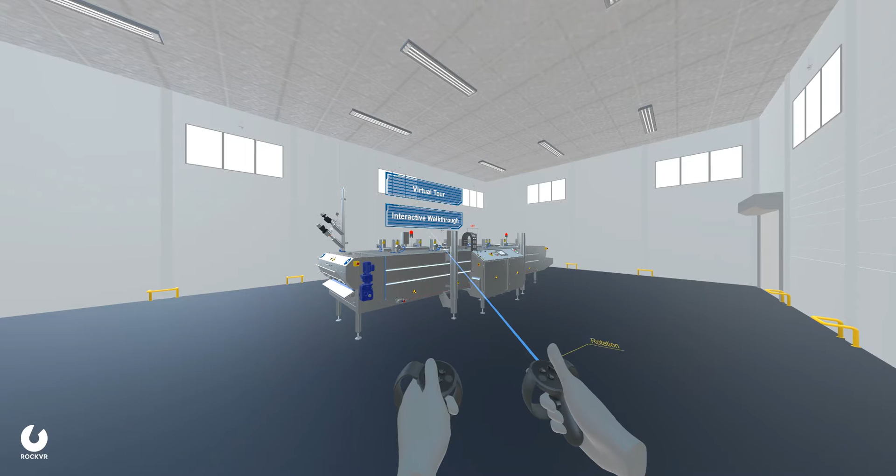This is a 2019 model.

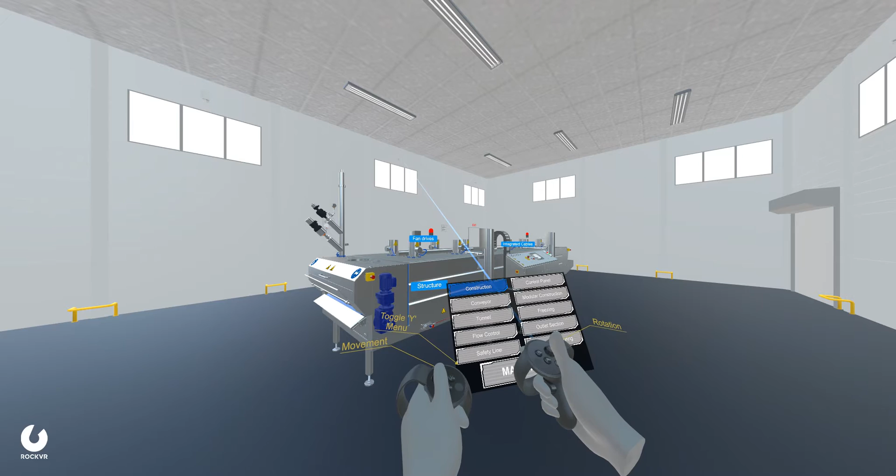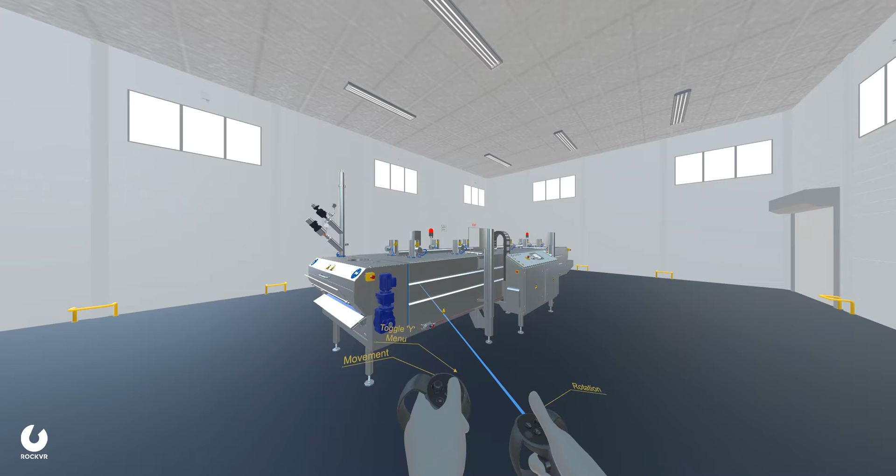Dohmeyer Tunnel Freezer is constructed according to USDA and FDA guidelines. The tunnel structure is made exclusively with stainless steel and blue, high-density polyethylene plastic.

No use of chrome, galvanized steel, or aluminum in any area. All the edges and curves are fully welded. The walls are made of stainless steel, both outside and inside, with high-pressure injected polyurethane foam insulation between the walls.

Unlike some competitors who may use wood insulation or mild steel on the inside walls, we use exclusively stainless steel and polyurethane foam.

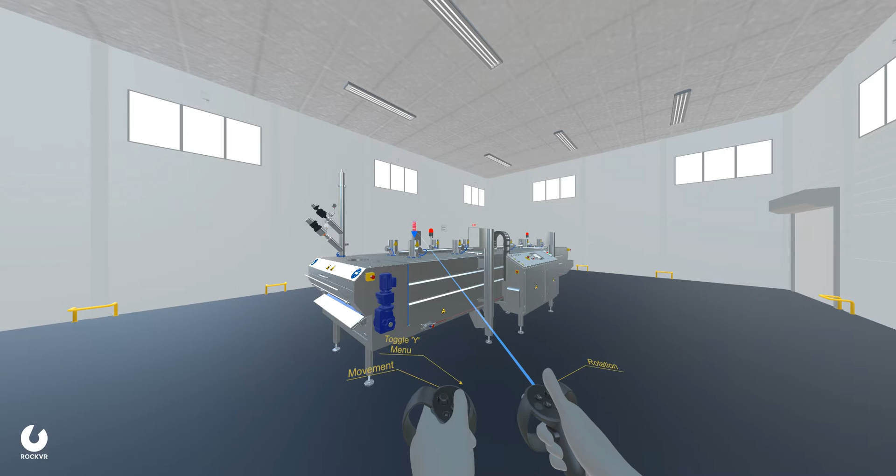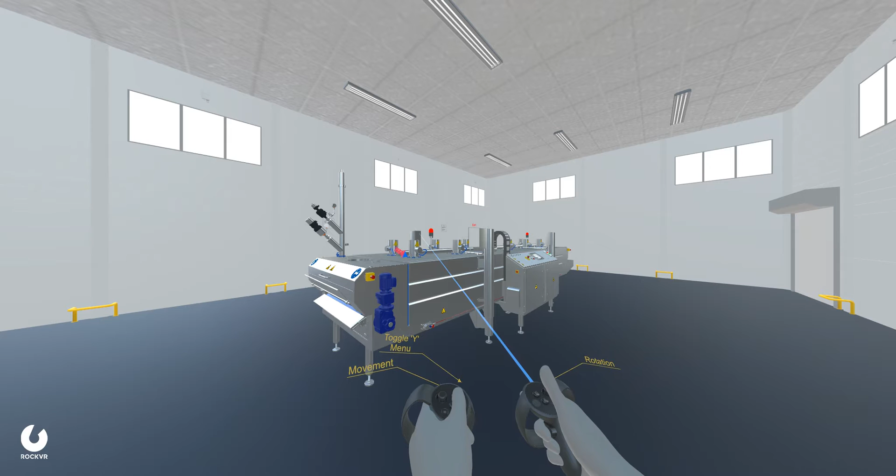The internal convection fans are driven by motors with stainless steel outer housing. They do not have any ventilation openings at the top, which makes it easy for a washdown. There are spacers at the mounting points for easy cleanability.

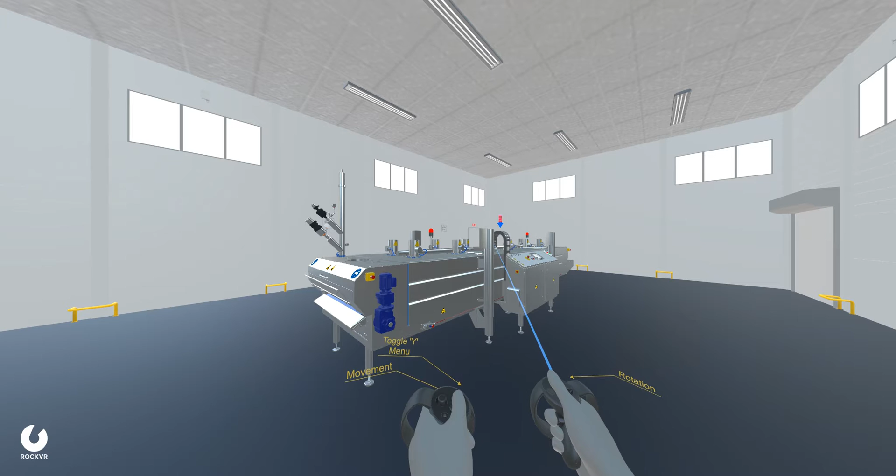All the cables are integrated inside stainless steel channels, which ensures there is no contamination. No loose wires can be seen on the machine. The flexible portions of the cable lines are housed inside a flexible cable tray.

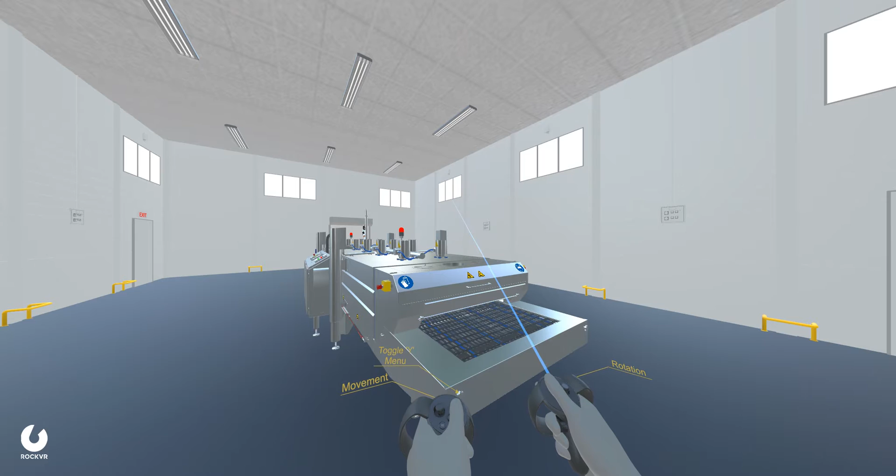The conveyor is an I-Link type belt sliding over blue, high-density polyethylene plastic supports for smoother operation. Tunnel models come in 4 sizes of conveyor belt width: 2, 3, 4, and 5 feet wide.

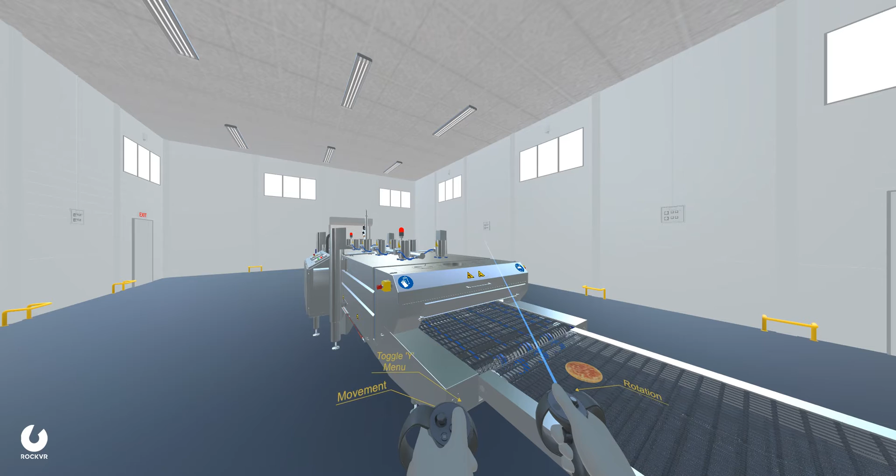The front cover is removable, and another conveyor belt can be positioned near the inlet portion so that chicken fillet, meat, or any other product can go from one belt to the other. Alternatively, the food can be manually introduced by persons standing in front of the inlet.

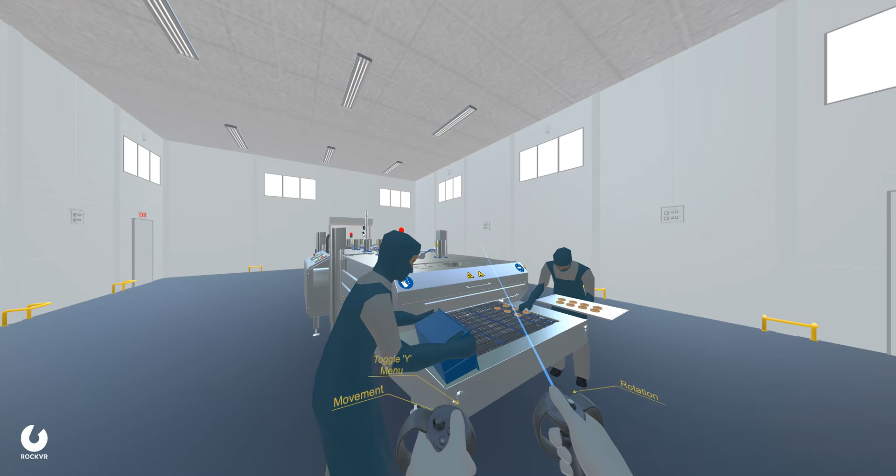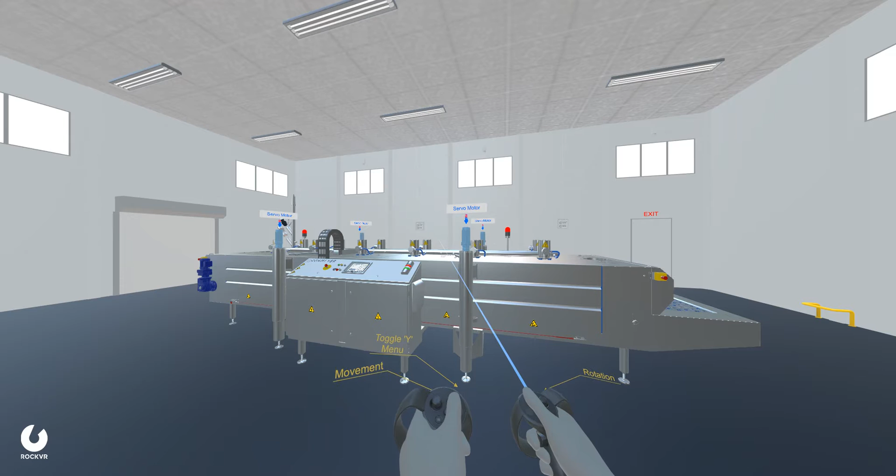The tunnel cover is opened using lifting legs, driven by servo motors turning a stainless steel spindle. When the open button is pressed, the lifting legs operate in a smooth and precise manner, lifting the top cover to a height of 2.5 feet. As no hydraulics are involved, there is no worry about leaks or issues related to hydraulics.

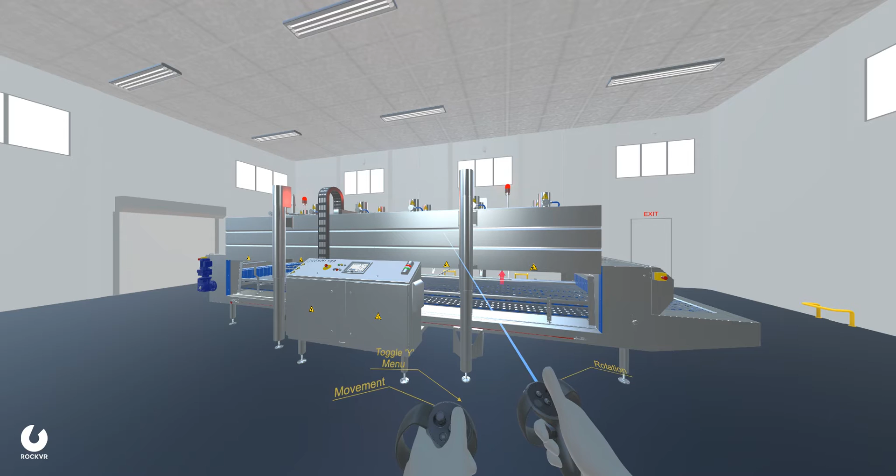The tunnel closure seal is made from a woven cord of stainless steel with a thin layer of Teflon covering it. This seal can handle and remain flexible even at a very low temperature range of -200 to 300 Fahrenheit.

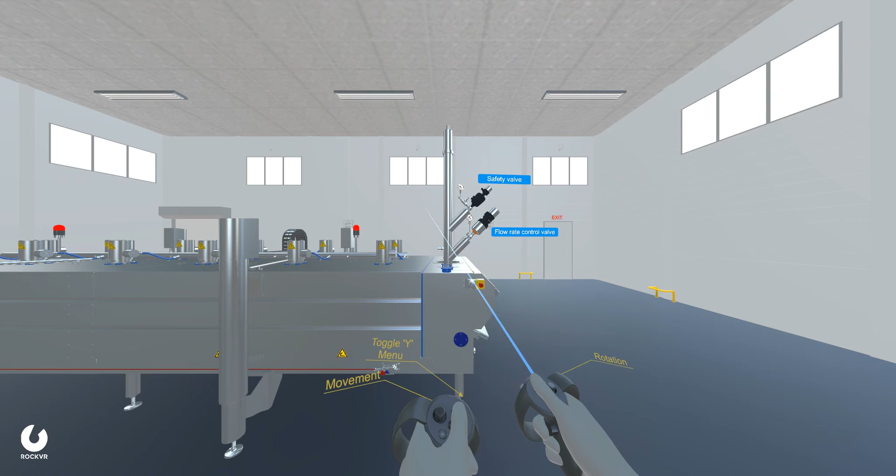The nitrogen inlet line has a safety block valve, which will shut off the flow of nitrogen in case of any emergency, like a low oxygen level in the area.

A proportional valve is also fixed on the nitrogen inlet line for controlling the rate of nitrogen gas flow into the tunnel freezer.

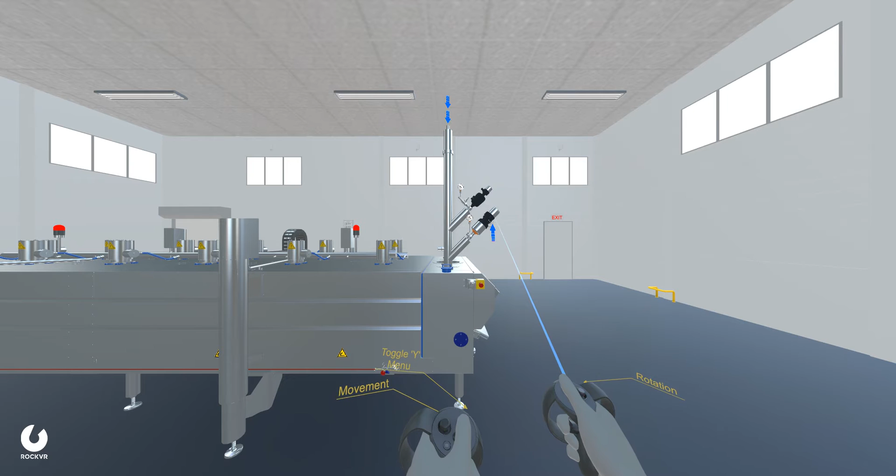The valve has 65,000 positions, providing fine flow regulation capability. Valves are protected by vacuum insulation, which prevents condensation and ice buildup.

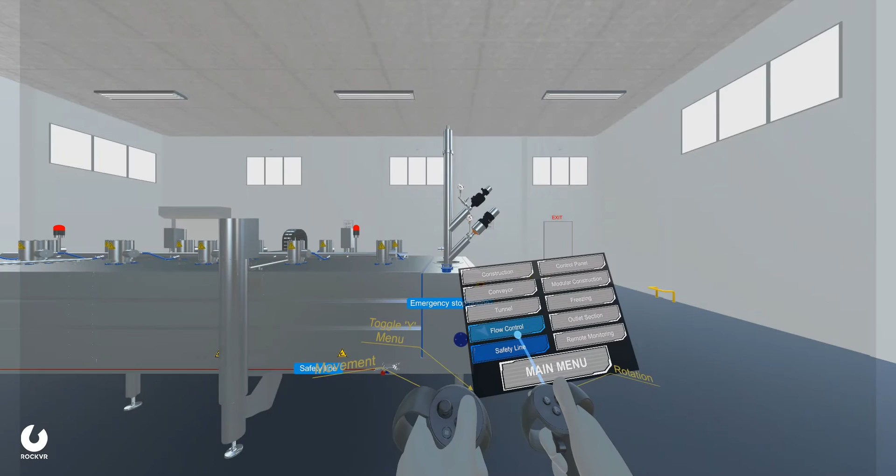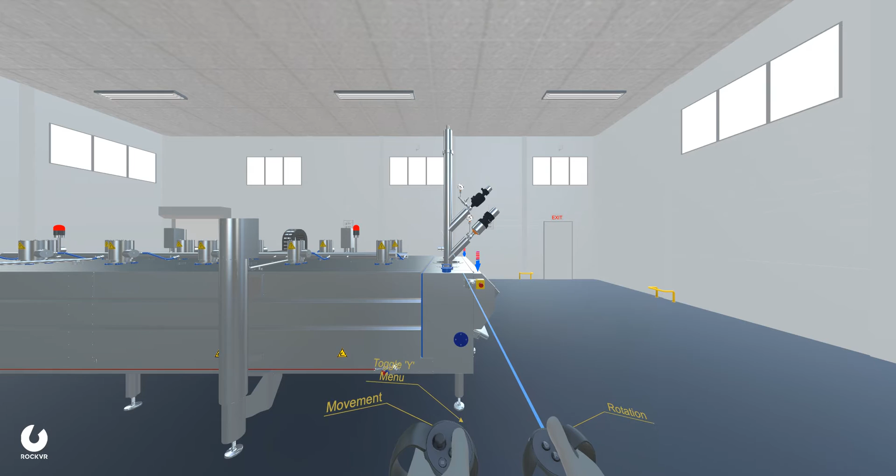Emergency stop buttons are positioned at critical locations of the product for safety. Safety lines are positioned on either side of the tunnel, running through its length. In case of emergency where the operator is not near an emergency button, the operator can pull the safety line to stop the machine.

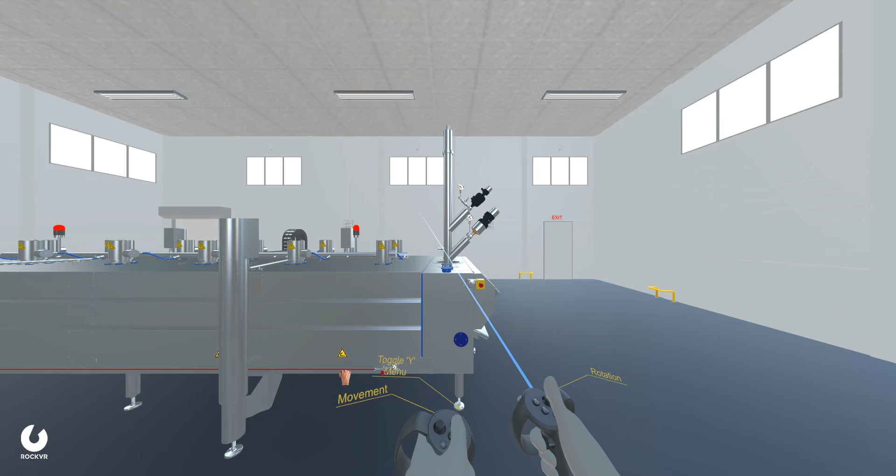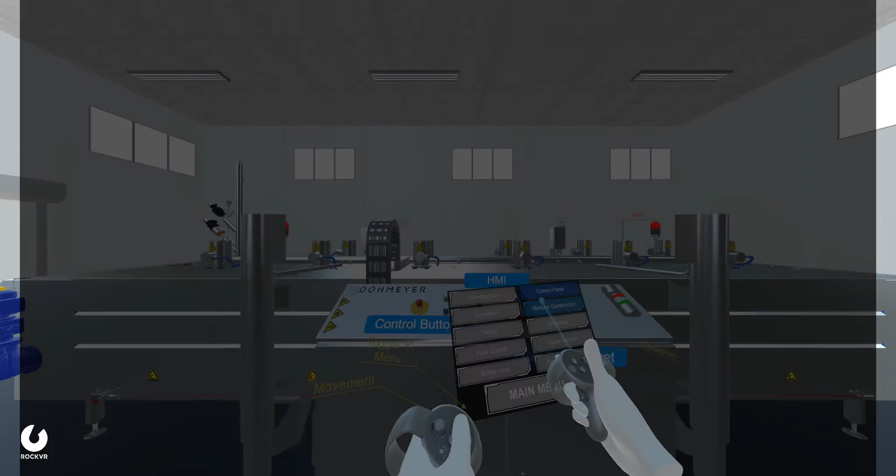The tunnel freezer has a certified cabinet with Allen Bradley PLC units inside. The HMI is protected by a safety cover made of stainless steel frame with a tough polycarbonate window panel. The cover is magnetically sealed in position.

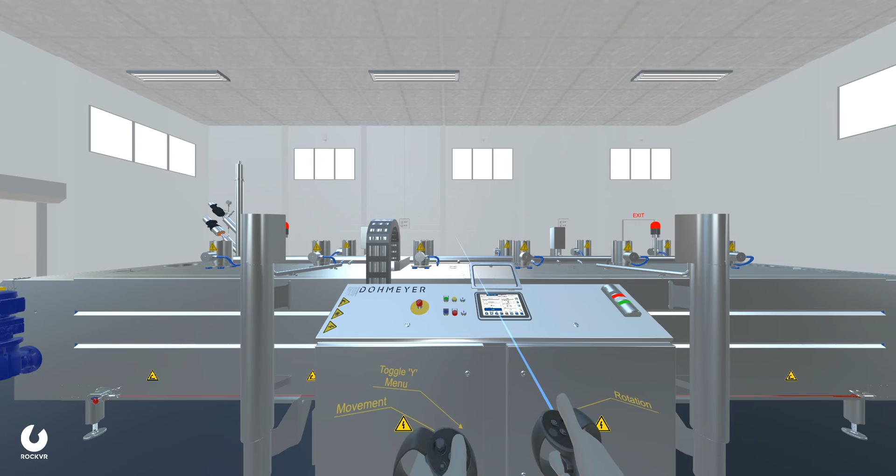The HMI is an Allen Bradley unit which can be used for manual operation or using preset recipes. The controller has memory for storing thousands of recipes, with precise ability to control the residence time, temperature, speed of internal convection fans, and the exhaust fans.

Operator can touch these buttons for various actions. The green button is for starting the freezer. The red button is for stopping the operation.

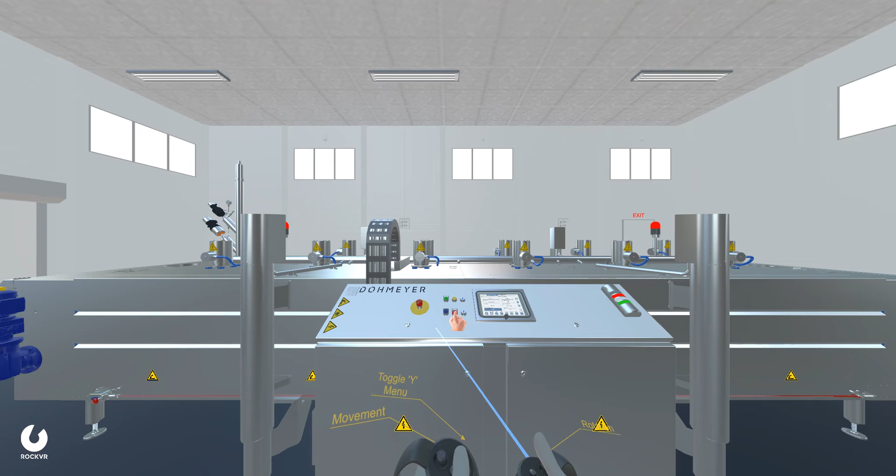The standby button is for temporary pause of operation when there may be a downstream block or break in operations. In standby mode, the freezer is set to hibernation mode, where tunnel temperature is brought to a safe level, the belt is slowed, and exhaust fan speed is reduced to minimum position to prevent overfreezing of food.

Releasing the standby button will let the system go back to set process conditions. The up and down buttons are for opening and closing the tunnel cover.

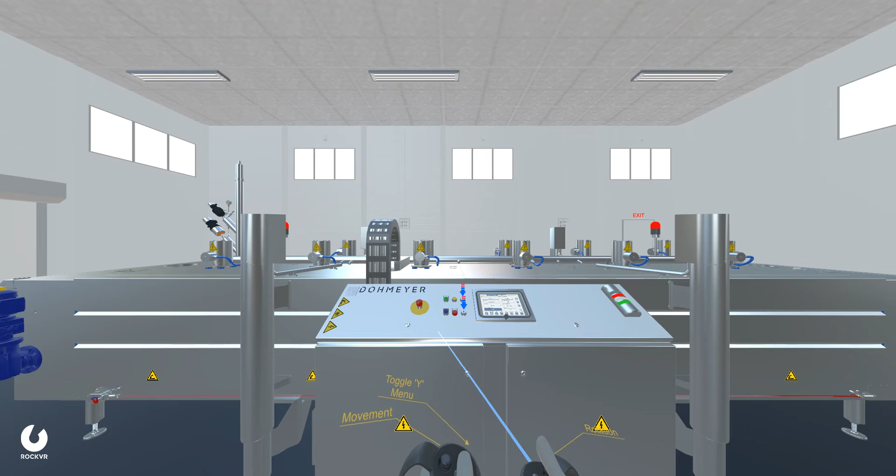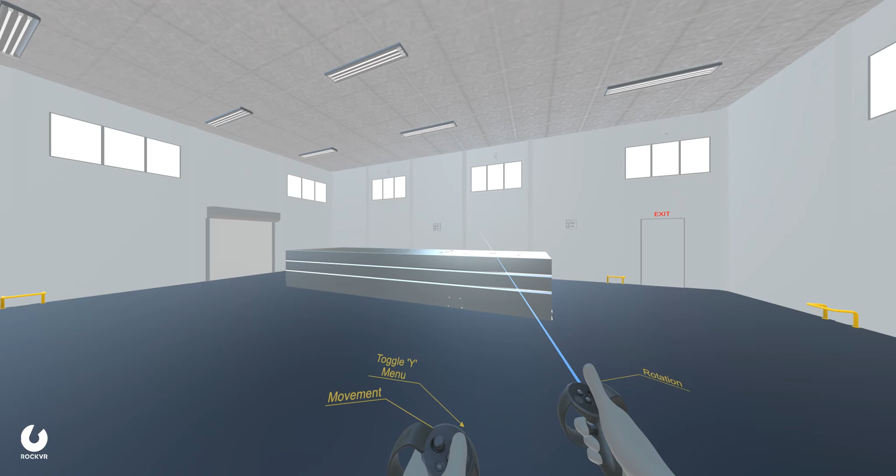Each tunnel section is 10 feet in length and is designed for modular construction. Tunnel length is extendable by adding up to 7 sections of 10 feet each. Sections are bolted; welded connections are also possible.

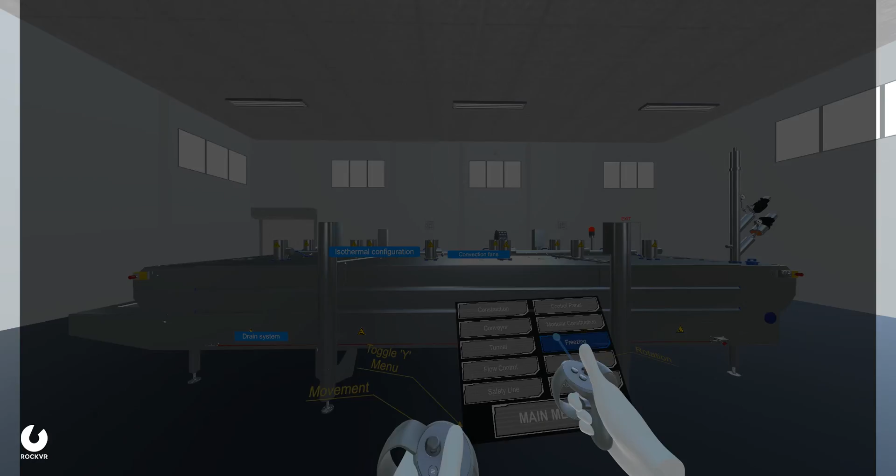The floor is slightly inclined to move the water to the ends and drain it out through the drain outlet.

The Dohmeyer model deploys an isothermal configuration of freezing. Liquid nitrogen is piped to the center of the tunnel, and it is then distributed and sprayed all over the tunnel on either side. This results in a uniform temperature distribution throughout the tunnel.

As the sprayed nitrogen hits the food products, it absorbs heat and expands rapidly, creating an overpressure situation, which spontaneously moves the gas to either side of the tunnel, and the gas is pulled out through the exhaust lines at both ends.

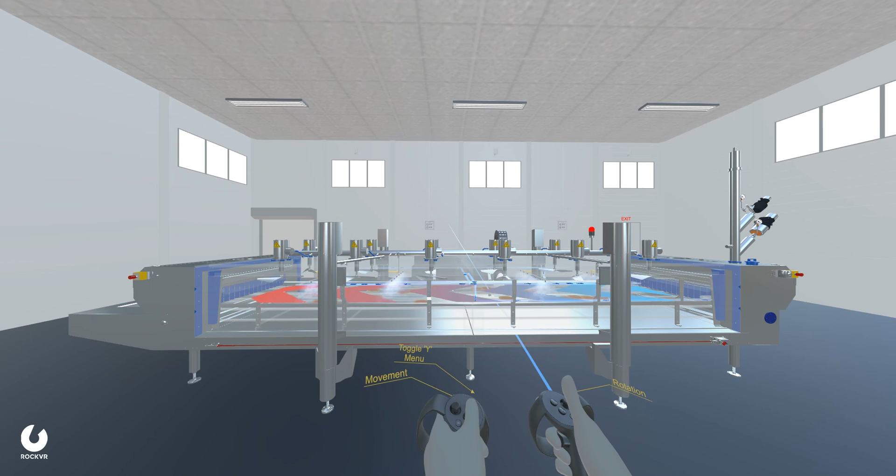Most tunnels in the industry are of co-current flow type, where the nitrogen is sprayed at the inlet portion of the tunnel, and the gas moves along with the flow of food product towards the outlet section. Or counter-current flow type, where the nitrogen is sprayed at the outlet side of the tunnel and the gas moves against the direction of food travel towards the inlet section.

These methods are very sensitive and often result in higher nitrogen consumption, lower capacity, and damage to product compared to the isothermal configuration.

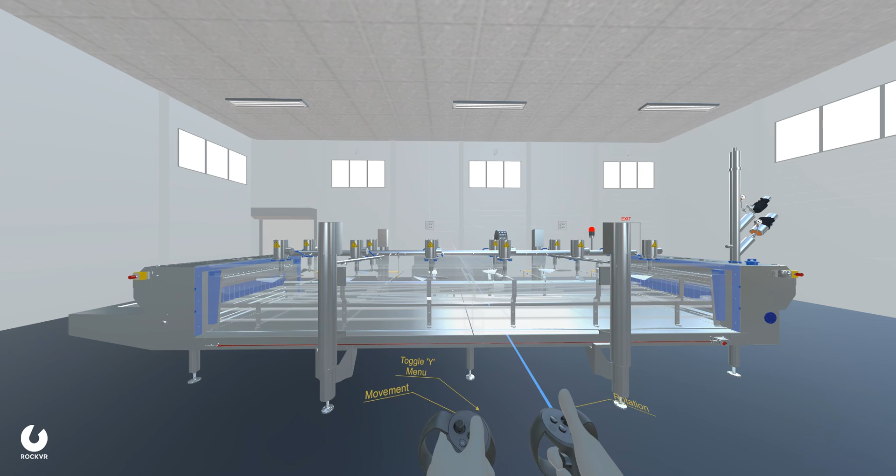Each section has 6 fans with stainless steel blades mounted on top, creating excellent turbulence inside the tunnel for uniform temperature distribution.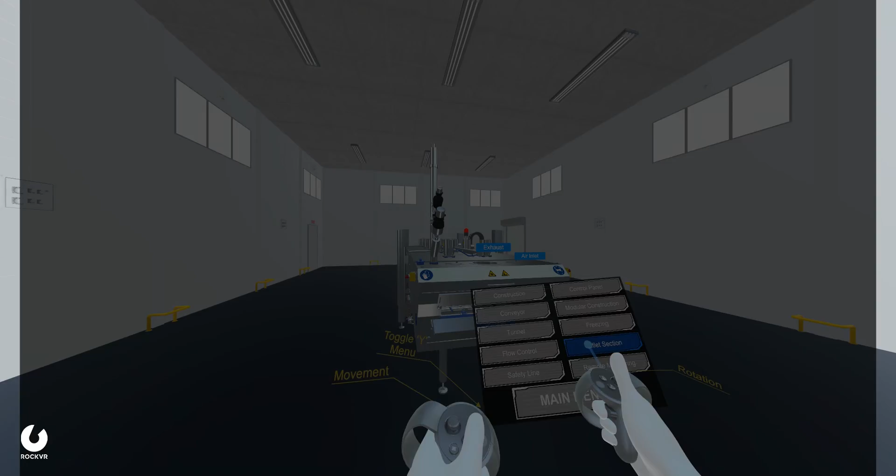A scraper with adjustable angle and position is located at the end of the conveyor to remove any sticking items on the conveyor.

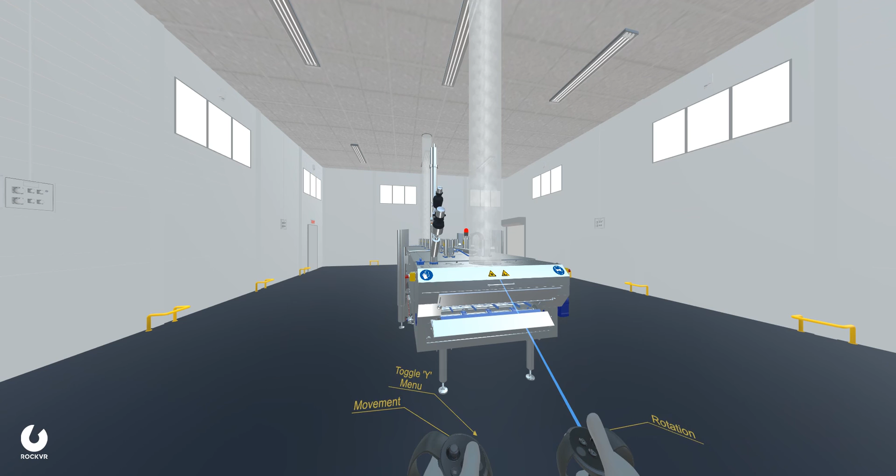Exhaust outlets are positioned on either side of the tunnel for removing the cold nitrogen air mixture coming out of the tunnel. An exhaust duct fixed to these 2 outlets is connected to an exhaust fan for moving the gases out of the building.

To avoid consumption of costly air-conditioned ambient room air, 2 air inlet port openings with throttle valves are provided for bringing air from outside the building.

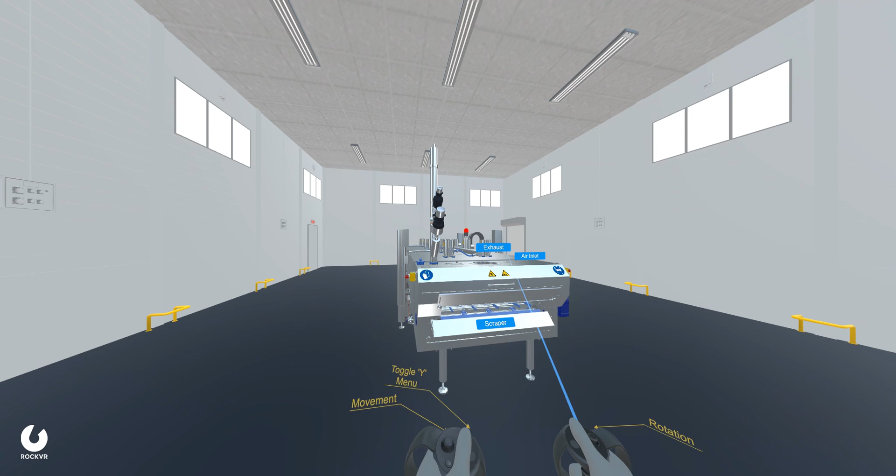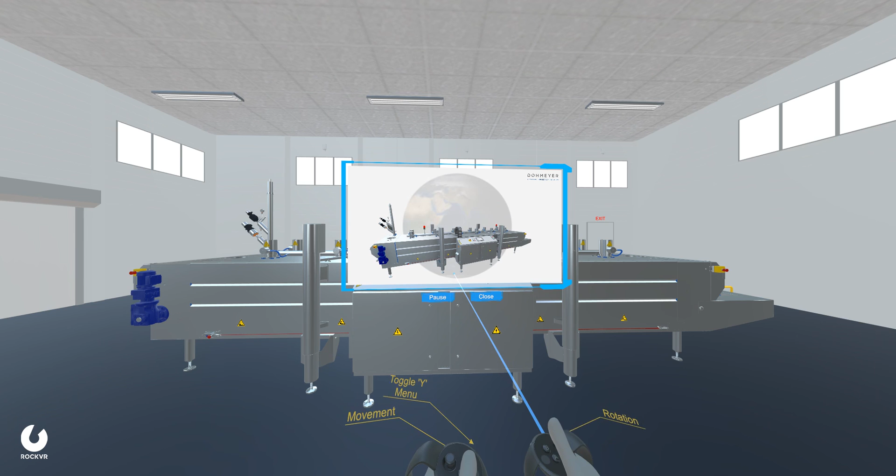Remote monitoring: the Allen Bradley Control System has an inbuilt modem for internet connectivity. Communication through LAN or GPRS module is available. Machine failure and any maintenance indicators are remotely monitored.

More than 3,000 Dohmeyer machines with remote monitoring capability are deployed across the world.